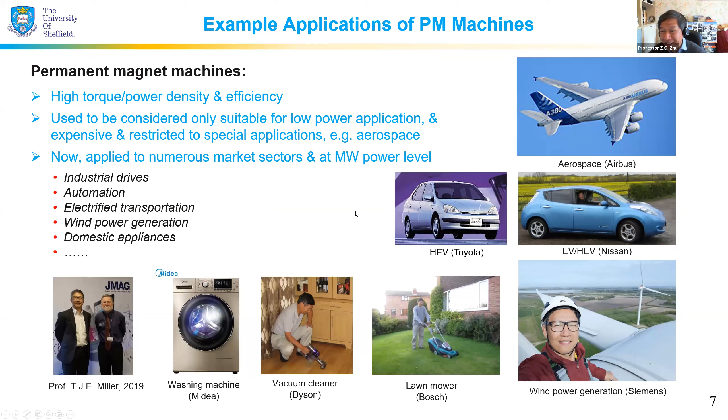That's for an electric ship. So the power is getting higher and higher. We don't know the limit, and we're trying to push as high as possible.

If we look at the permanent magnet machine, when I talk about permanent magnet machines, I'm mainly talking about the rare earth magnet, specifically neodymium magnet type machines. Today, I'm particularly going to focus on the so-called IPM machine — interior permanent magnet rotor.

Before that, I'd like to make, as usual, an introduction to the IPM machine. So-called IPM machine means the magnet has been buried inside the rotor iron. The nice thing here is that you don't need any extra retainer for the magnet. Now we have the magnet for excitation, and in order to produce torque, we must have current carrying conductors, so on the stator side we have conductors.

Then, in order to improve the magnetic circuit, we need iron, or very often we call it lamination, on the rotor and stator to improve the magnetic circuit. Because electrical machines normally always have one stationary part and one rotating part, we also need an air gap. If we talk very briefly, that's all for an electrical machine — but it's not as simple as that. There's a lot of variety there.

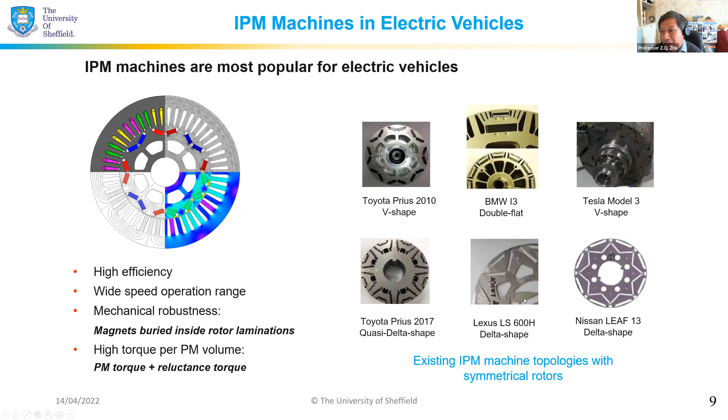But if we just focus on Toyota's IPM machines, I've been working with them continuously for more than 20 years now, and witnessed their development, and it's very exciting. So they started with the I-bar and then changed it to V-shape. The reason they changed it to V-shape is because you can utilize flux focusing—the cross-section area of this one is larger than that. And then they used the delta type to enhance the air gap field, for example.

And then one generation, the change was actually not in the magnet, but in the winding and the structure, like hairpin type. And then the latest one, as I mentioned, is like this one. They all have their features. And now the important thing is all of them are utilizing a similar stator, essentially the same stator.

So that means for the IPM machine, we normally need to have a so-called distributed overlapping winding in order to utilize the reluctance torque. This is important, and there's more variation in the rotor topologies.

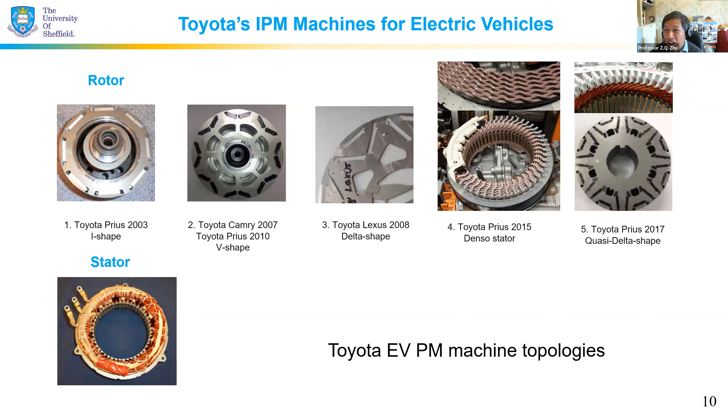This is quite a common feature for permanent magnet machines. Okay, now let's have a look at the IPM machine. You can have a variety here, showing the influence of the number of layers for the IPM machine. So here we've got only one layer, here two layers, here three layers, and here a lot of layers. You can even utilize the lamination, axially laminated, segmented by the magnet, for example.

In this case, obviously, theoretically, as the number of layers increases, the reluctance torque increases, and the performance gets better and better. But we need to consider that as the number of layers increases, the manufacturing complexity increases, and we need a trade-off. On the other hand, in terms of performance, as the number of layers increases, the gain you get gradually diminishes.

So it's quite saturated. While the performance gradually saturates, what's the point if we try to put more money into manufacturing? So you can do an analysis, and you will find that from one layer to two layers, you have quite a significant improvement.

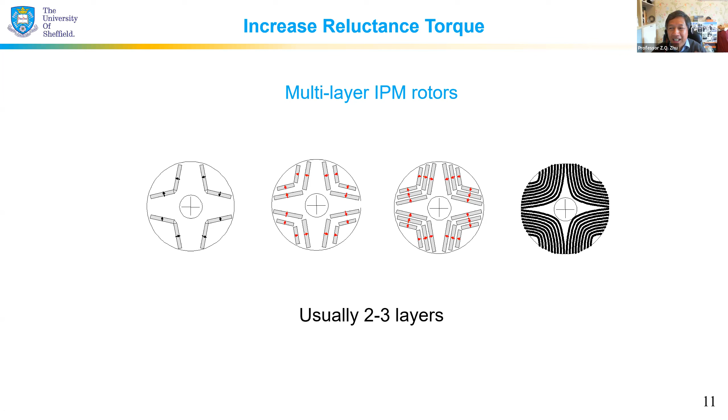From 2 layer to 3 layer, you still get some good improvement, but not as big as from 1 layer to 2 layer. From 3 layer to 4 layer, it's almost saturated, not much benefit there. So in reality, you will say 2-layer or 3-layer is the limit. In fact, currently, if you see all those IPM machines in commercialization, still less than 2 layers. That's because of the trade-off between cost and performance, so that's what we need to bear in mind.

Let's look at the popular IPM rotors already utilized in Toyota, Nissan, BMW, or more popularly now called the double V. Important things are not only the amount of magnet material but also the number of magnets, because the more segments you have, the more you need to handle, which relates to labor cost or manufacturing cost. So this V-shaped one only has 2 magnets per pole, this one has 3 magnets per pole, this one also only 2, and this one has 4. People try to reduce the amount of magnet segments as much as possible, again as a trade-off between cost and performance.

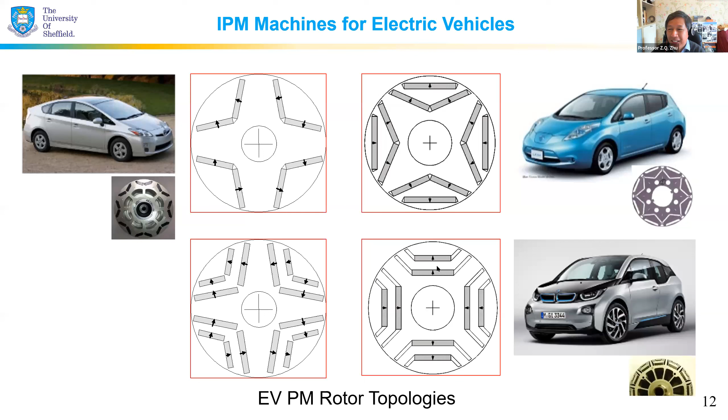I'd like to quickly go through the stator side. Not too many variations, but still some variety there. Here you can see the coil simply wound on the tooth. This is what we call double layer, because you have 2 coil sides in the same slot. This one is called single layer winding, or non-overlapping winding, because if you look at the end winding, they are not overlapping each other for phase A, or A, B, C phases. This kind of winding looks very neat, and it's very good for automation because you can make it modular. The end winding is so short that the effective part can be extended within the same machine space envelope. But one issue with this type of machine is it's normally a fractional slot machine, meaning the number of slots per phase is fractional.

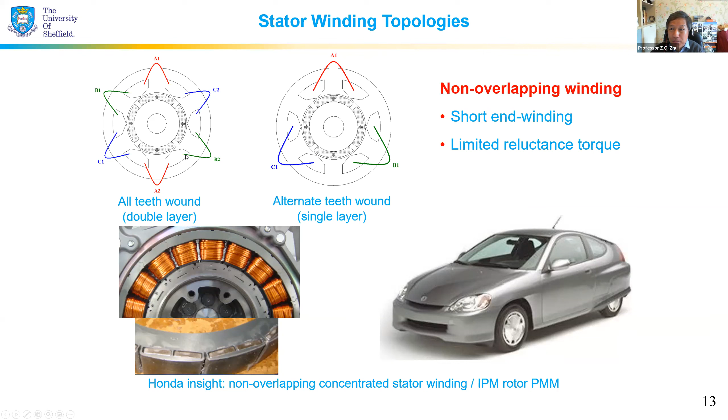Consequently, the reluctance torque will be limited, meaning you need to use more magnets to produce the same torque. In this aspect, it's not so good because you need more magnets, but the end winding is shorter. So you need a good balance depending on which factor matters more. But in electric vehicles in general, this type of machine topology is less used for the main traction machine.

The more popular one is this so-called overlapping winding, which can be distributed, meaning per pole we have more than 1 coil, versus just 1 coil which is concentrated winding. This is because the coil pitch is almost equal to the pole pitch - you can see from here to there, that's almost 1 pole pitch - so you can utilize the collective flux produced by that magnet. More importantly, if we utilize the IPM rotor - this is SPM rotor, only for illustration of the stator winding - if you utilize the IPM rotor, you can utilize the reluctance torque, which is very good. You can reduce the amount of magnet, but this one has a longer end winding. Overall, as a trade-off, the gain from reluctance torque versus the demerit of longer end winding is a good trade-off.

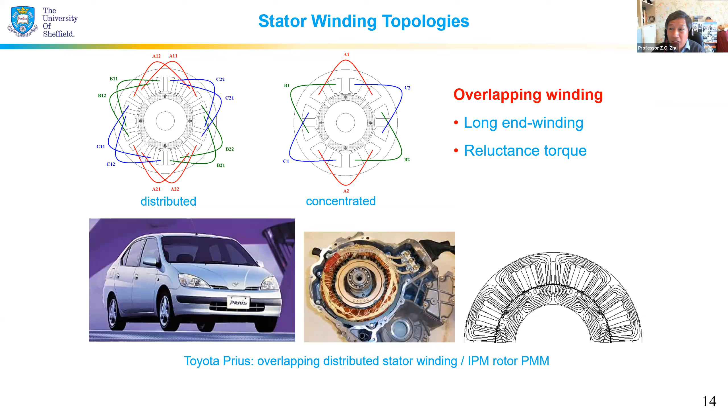So this is more popular. Of course, there's a lot of other performance considerations, for example high speed uncontrolled generator fault - this one is better because you utilize less magnet, so consequently the EMF will be lower than the other type. In case of inverter failure, the induced EMF is lower, so the inverter is safe, the DC link side is safe, for example. There's a lot of other factors, but I'm only talking about the main part.

Now I'm going to start with my main topic. But before that, I would like to talk about what is the torque production in the IPM permanent magnet machine.

As I mentioned, in the IPM machine, we have two torque components. One is called the PM torque, one is called the reluctance torque. Reluctance torque has nothing to do with the permanent magnet. Even if you don't have any magnet there, the machine still can generate reluctance torque. But with only reluctance torque, you normally have lower torque density compared with the PM machine, and also you have poor power factor. So this IPM machine has the synergy of both, utilizing less magnet and also utilizing the reluctance torque.

The PM torque here is expressed like this. This part is the PM torque, the conventional one — essentially flux produced by the magnet times the current. That's the power and the force or torque. Then another one is pure reluctance torque. You can see the angle here — the reluctance torque has twice the angle.

If you just plot the PM torque and the reluctance torque, it looks something like this. PM torque is like that — this is the current. Zero means the EMF and the current phase angle are aligned. And maximum is always when the EMF is aligned with the current, you get maximum.

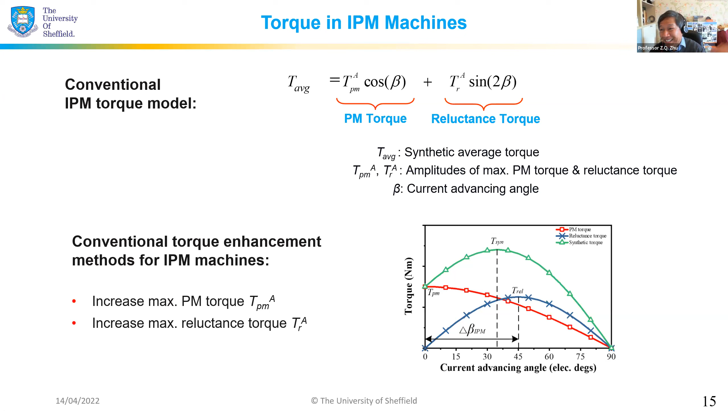If you would like to increase the torque of this IPM machine, one option is to increase the PM torque, another is to increase the reluctance torque. But today I'm going to talk about something a little different — changing the angle between the maximums, trying to utilize another degree of freedom to increase the torque. So the remaining part, I'm only going to show examples.

But before that, if we want to increase the PM torque and reluctance torque, how do we do it? To increase the PM torque, as I mentioned, you can utilize flux focusing by employing a V-shaped magnet, or even more by using a U-shaped magnet for flux focusing. Therefore, you can have more flux produced in the air gap to link with the stator coil, producing higher flux linkage and consequently a higher back EMF waveform and magnetomotive force.

But in this case, obviously you are using more magnet material and a higher number of magnet segments, so you need to bear in mind the cost — the more cost you put in, the vehicle performance may get better, but if you're making the machine, your profit is reducing as well.

Then you can also try to increase the reluctance torque. Normally you try to increase the number of layers to increase the so-called saliency ratio, that is, the ratio between the D-axis and Q-axis inductance. But as I mentioned earlier, as the number gradually increases, that ratio gradually diminishes. So typically we use 2 or 3 layers — that's very common.

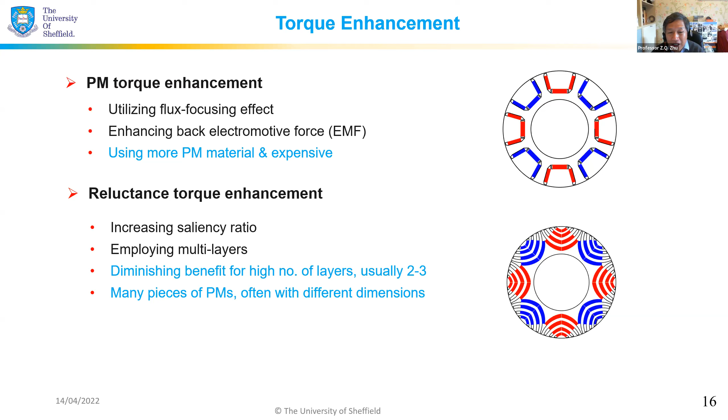Now let's go to my main topic. What we try to use is a technique called the magnetic field shifting technique. We try to change the angle between the peaks of PM torque and reluctance torque to enhance the torque. By doing that, we need to introduce so-called asymmetric IPM machine techniques. Let's have a look.

First, I would like to compare with the conventional IPM machine. In the conventional IPM machine, essentially you don't have any shift. For this one, we try to introduce an angle — this is the so-called asymmetric IPM rotor shifting angle. So what's happening by doing that?

This is what I showed you earlier — I'm going to talk about this one. You have the PM torque here, you have the reluctance torque there. Their peaks' position for that current angle, related to the rotor angle, has been shifted — it's the same thing, one is in time, one is in space. So now the PM torque is here, and the reluctance torque is here — that bit of angle has been changed.

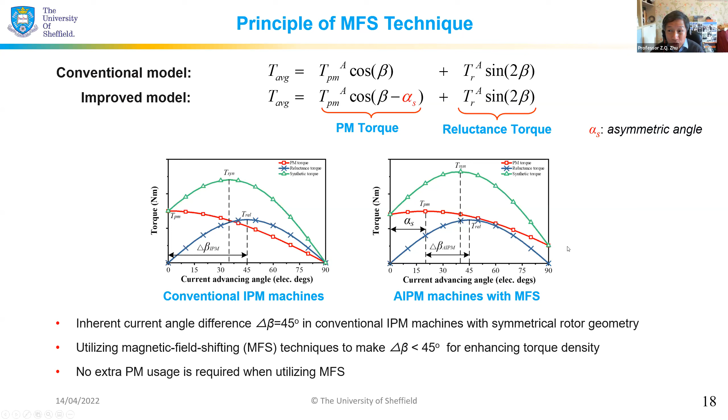The amount of magnet remains the same. We keep it the same, so that magnet amount, the cost is the same.

Now let's look at how we can realize this so-called asymmetry. There's quite a famous topology proposed by Mitsubishi. This is essentially V-shaped. We've got this side and that side, but both sides are not symmetrical. Not only are they not symmetrical, but importantly we have a flux barrier there. Because if you use a V-shape without that flux barrier, there's not much difference from the symmetrical case, because the flux ultimately all goes to the same place anyway, focused onto there.

By introducing this flux barrier, we can modify the air gap field distribution, shift the fundamental air gap flux density, and by shifting it, we can change the angle. This is a simple principle.

If you look at that, there's a variety you can do. For example, you can have a PM configuration, asymmetric or symmetric, or the rotor core geometry, or the flux barrier, which can be symmetrical or asymmetrical. Together, you can form novel asymmetric IPM machine topologies.

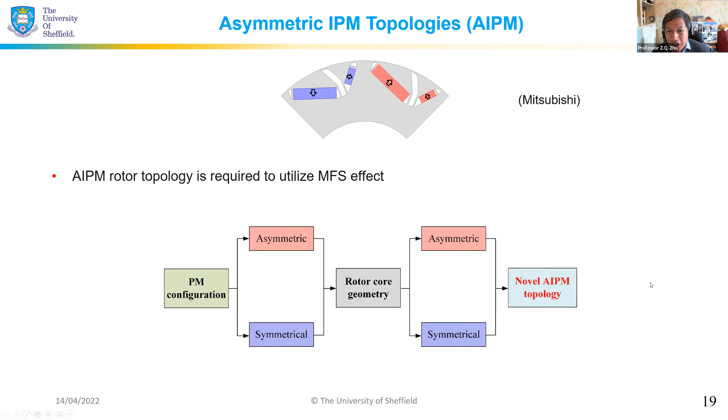As I mentioned at the beginning, PM machines have a lot of variety, although it looks simple - only got magnet, iron, and copper. But we have a lot of topologies. So even here, we can have a lot.

But how do we define those machine topologies? We have proposed a simple technique, utilizing 4 quadrants, where one axis is the rotor core, the flux barrier, whether symmetrical or not. This side, the rotor iron structure, is all symmetrical, and that side is asymmetrical. The other axis is the PM configurations - the top side PM configurations are symmetrical, and the bottom one is asymmetrical.

Let's take one example. If you look at the iron structure here, it's symmetrical about the axis of the pole. Symmetrical here, but this side is not symmetrical - you look, this got a little bit there, not symmetrical. This side is very obvious, not symmetrical. But if we look at the magnet, for example, here it's symmetrical, but that's asymmetrical.

Now let's have a look at more detail. So this is the overall view. Let's look at the first quadrant, because the group here is symmetrical here, symmetrical here, so you can have a combination - 2 combinations, in total 4. So just focus on this: the magnet should be symmetrical, and the iron structure should be symmetrical. So here you can have this and that. How do I utilize it?

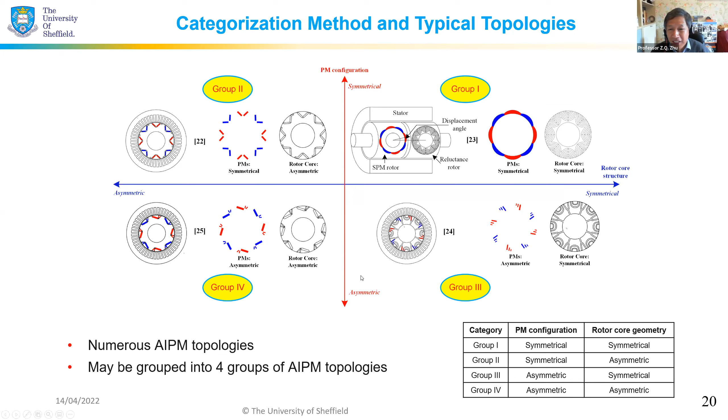Now let's have a look one by one. Each of them - first is the symmetrical PMs and symmetrical rotor core. Essentially you can try to utilize 2 rotors on the same shaft, so it's still quite simple, not that complicated. But the relative position between this PM rotor and the reluctance rotor can be shifted, so you have freedom to change it here.

In fact, this topology was well developed a long time ago, by Professor Brian Chalmers at Manchester. But at that time, they didn't consider this torque enhancement - they mainly considered how to improve the flux weakening capability.

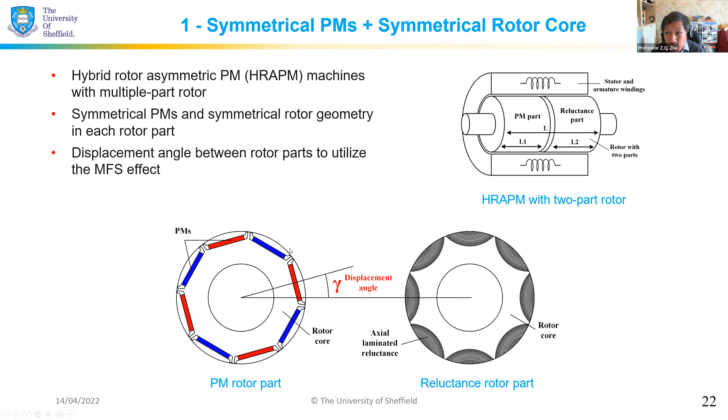Their machine is similar, but they didn't consider this angle for torque enhancement, so it's slightly different. In this case, on the rotor part, you may have 2 rotor parts, or 3 rotor parts, to make it more balanced. Then around the axis, not necessarily do you need identical parts.

You can optimize the PM torque and reluctance torque components. So in addition to the conventional rotor, you have at least 2 more freedoms: one is the portion around the axis, another is the angle between the 2 rotors. So you get more freedom to optimize the machine.

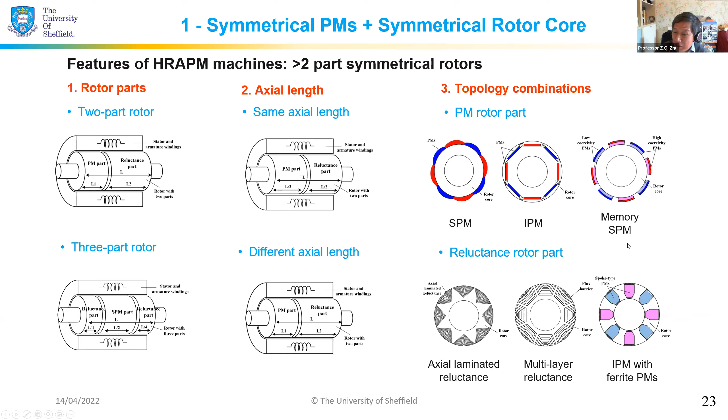In terms of topology, as I mentioned earlier, I'm showing one surface mounted and another pure reluctance. Obviously you can have any type of PM rotor or reluctance PM rotor as well. This one is even a memory machine, for example, and you can have a spoke type, or any other combination. So there's a variety here.

Typically showing here, this is with the 2 parts equal type, and then they've got 3 portions, also 3 portions where the reluctance rotor is in the middle or at the other side. But honestly speaking, by doing that, you definitely will get good torque improvement.

Whether you have axial balance or unbalance depends on the structure. If the two portions are structurally different, it will cause unbalance. Even if this side has the same structure, but one is magnet and one is reluctance, it's also not balanced. But this side is definitely balanced - axially it's symmetric.

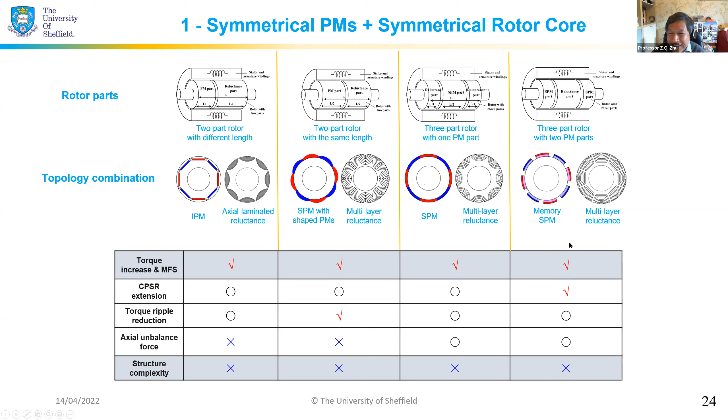Now we'll look at another one, which has symmetrical PM but asymmetrical rotor core. In this case, we only utilize one rotor to realize this magnetic field shift. You can see the symmetrical magnet - all of them are symmetrical. But here you can clearly see the asymmetric iron there.

There's a lot of asymmetry you can see here as well. You can see the iron cavity or flux barriers - they are not symmetrical. This one goes towards outside, this one towards inside, this one is somewhere here. It's like that Mitsubishi one - I'll talk more about it later, don't worry.

Then this one has symmetry, but the barrier is something like that. And when it's a spoke type, you can shift it. Well, this one and that one have some similarity there - just a different realization. Some of them you've probably found are already quite popular anyway.

Again you can compare this torque increase - yes, they can increase, no problem, the shifting effect is all there. Then this one is interesting, the very well known Mitsubishi one - I'll show you later, the effect is quite small. Not only found by us, but also found by other professors, Japanese professors.

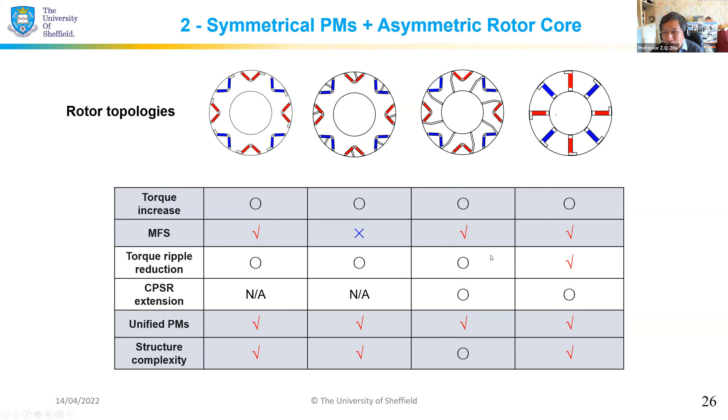Now we move on to the asymmetrical PM with symmetrical rotor cores. In this case, if you try to make it asymmetrical inside this type of machine, it's quite simple because we just make the air gap different here. The magnet shifts relative to the inside of the machine.

Now in this case, also the same way, but this is another machine topology, itself different, with the surface and IPM combination. So you can also just shift it there. And then you can also utilize the hybrid magnet type.

In this case, one side is neodymium iron boron magnet, and the other side is ferrite. So to make it asymmetric, okay? But you do need to be very careful, in my opinion.

It looks like the asymmetric alignment is fine, but in reality, in theory, the ferrite and the neodymium iron boron magnet produce a flux that goes to the air gap as a resultant. So in theory, without any asymmetric alignment, without the saturation effect, this is still symmetrical in the air gap. So you need to be very careful, or you can think of it another way: this type of asymmetry could be not so effective.

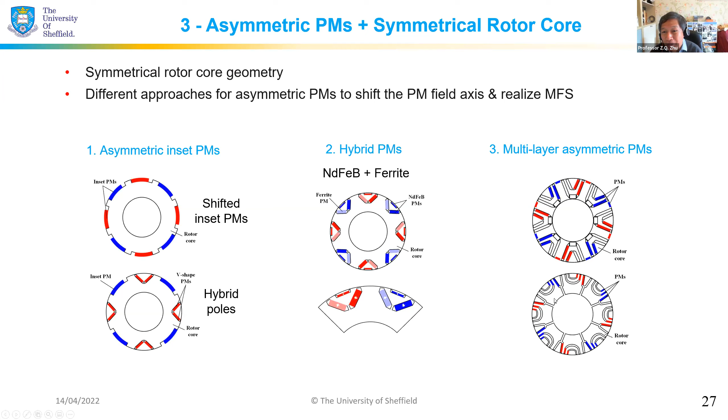Now, if you look here, we consider torque, yes, can be increased. The magnetic field shifting, yes, we can realize that. And the important thing, very important, is about the unified PM.

Because, for example, this one has two types of magnet, this type and that type. But that one also has two types there. This one, all the magnets have different sizes in one pole, and this one the same, so that could be costly.

A lot of people, when they design it, they don't care about this. This is a problem. If you look at existing commercial products, we find that they are all identical. Why? Simpler. And the structure complexity, we also need to consider as well.

Obviously, these two parts are simple. Yeah, this is the simplest. Then this one, after this, becomes more and more complicated. So we need to bear that in mind.

When the machine structure is too complex, the application will be limited because you also make the manufacturing cost expensive. This is why I always encourage my students to think at least about the simple way, not the complicated way. You can make it complicated and write a paper, but that paper is not very valuable because in reality, it's not able to be employed.

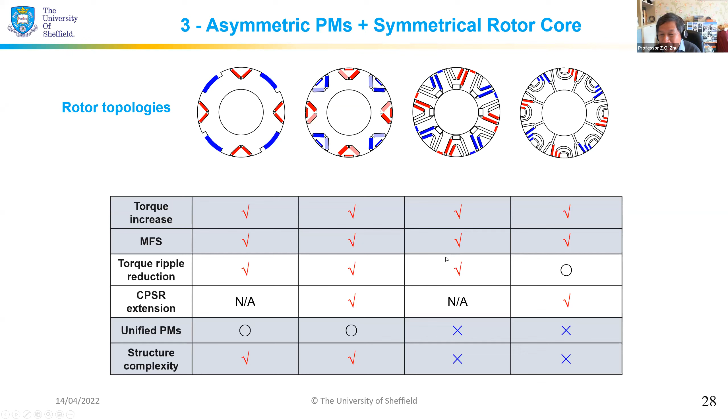Okay, now the last one we try to introduce is asymmetric PM and asymmetric flux barrier rotor core. In this case, you can say it's a V shape more or less, but one side is different. One side has no magnet, so only one magnet. Simple. And then another one is a hybrid one.

You can see here two layers, here one layer. Yeah, here two layer, here one layer. And then this one, one of the magnets has been taken off. This is all proposed by us, and yeah, I'll show you more.

And this one is a combination of the spoke type and the V shape, together with asymmetry there. Now this is important: without that asymmetric bit put in there, the machine is still symmetrical. Okay, so this is a mixed radial and circumferential one, and this one is a multi-layer one. You put the magnet asymmetric there.

But to be honest, it's terribly complicated. By doing that, as I said, if it's linear, no difference. But this one, yes, has asymmetry. It's not produced by this part, it's produced by their bit. Can you see there?

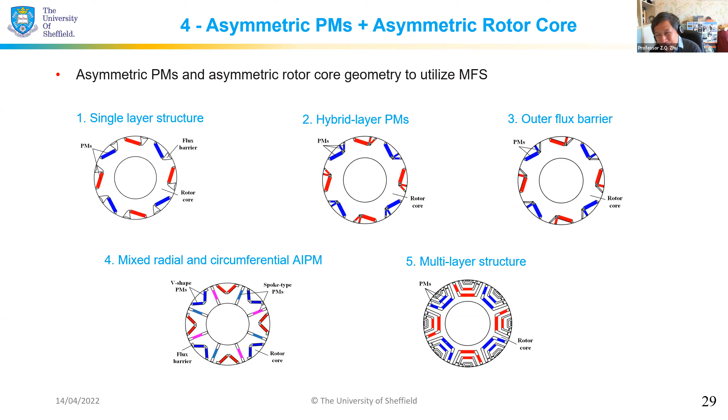They've got a little bit of flux barrier there. To me, it's horrible anyway. Okay, it is a machine, but I wouldn't use it anyway.

Okay, let's have a look further in the comparison. The torque increment, yes, you can increase it, and I'm not telling you how much — I'll show you the detail later. The magnetic field also can be shifted as well.

Torque ripple reduction: when you use multi-layer, you do need to be very careful. And then in terms of magnet, whether there's a same size one, this you can use just two. But that one is the best, because the reason is you can have this magnet, that magnet, all the same size — very good. And this one is slightly less, because you can't make this one and that one the same. But in theory it's not too bad as well.

It depends on the design. The structural complexity, definitely that one is more complicated. Okay, this one is about the mechanical integrity — it's a bit more, but this one is easier.

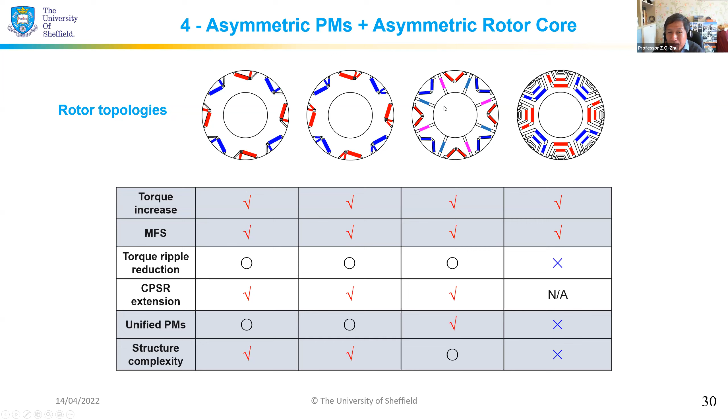Okay, now we have 4, so I would like to put them all together. Let's talk about it, and let's move it here. Now in this case — I don't understand why, but one cursor keeps moving automatically, I can't figure it out yet. Last time I tried to remove it, I couldn't. Excuse me. Okay, so I've put it down here, the global one.

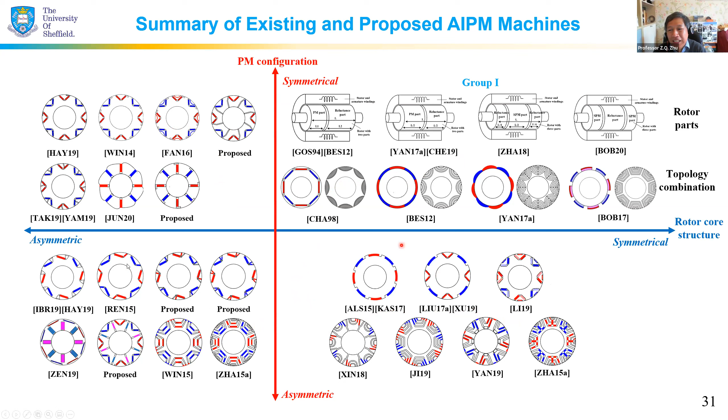You've got essentially two rotor — okay, two rotor there — and you can evaluate it all there. I just tried to put as much as I can, but I've talked about all those in detail. After that, I'll try to look at the performance, the detailed comparison. I think this is quite important. I'm sure principally you understand that already, right?

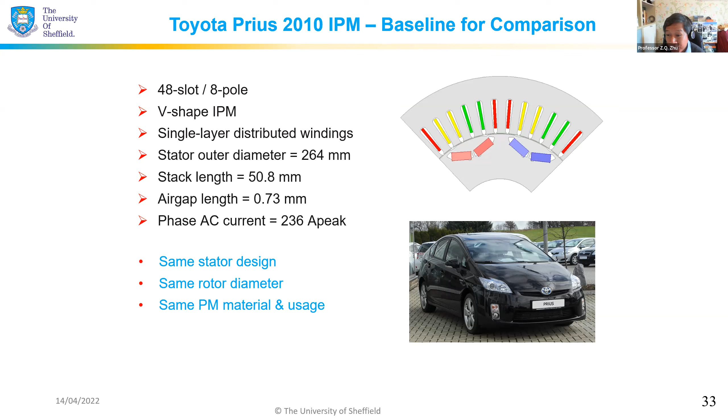Now let's have a comparison. So what I'm trying to do is take the Toyota Prius as a baseline, so the vast majority of dimensions are the same — same stator design, same rotor diameter, air gap, and same magnet material and usage. All this is the same.

Now let's have a look. This is the topologies which I'm going to compare, referenced to the Toyota Prius. So I have selected six machine topologies. Among these, three of them are proposed by us at Sheffield, by my PhD student Dr. Yang Xiao, and this is one already existing in the literature.

I just quickly highlight again: this is a combination of SPM and V-shape IPM. And this one is V-shaped, but with an asymmetric cavity. And this one has two rotors, combined with surface-mounted and IPM.

And then the one we proposed here essentially is this hybrid spoke and radial one, but with asymmetry there — you can see asymmetry here and asymmetry there. And here we've got essentially one side is a single layer, one side is two layer. And then one of them has two small magnets inserted into two cavities.

And then this one only puts the magnet into one of them. Okay, I will compare with another one with the magnet only on this side, because that's the Mitsubishi one. I'll compare separately, but let's compare these six first.

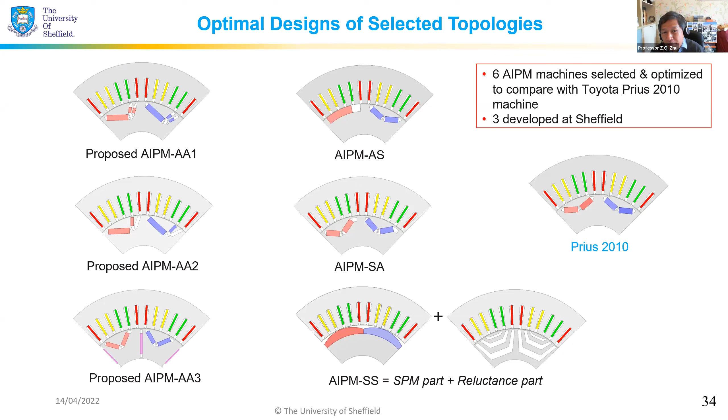Now, for all those six, I'm showing the structures here again just for simplicity. So first of all, what you can see: here I'm showing the resultant torque, that's the red color, and then the PM torque, which is the dark blue one, and the green one is the reluctance torque.

So you can see all those machines have reluctance and PM torque there. The amount of magnet is the same, don't forget. Okay, now it's quite interesting — I'm not going to talk about that one because it's essentially reflected here and it's the same. That's just showing what happens when the current is small until it's very large, and they are very consistent. I don't see too much crossover — there's a couple of them that crossover, but not too much.

So let's just talk about this one. In this case, let's compare this machine and that machine because they're next to each other. Very interesting: you can see this machine compared with the Toyota Prius, the PM torque is less, here and there. So PM torque is less than the Toyota Prius, reluctance torque is also less than the Toyota Prius, but the resultant torque is higher. So this clearly illustrates the effectiveness of magnetic field shifting — PM torque is less, reluctance torque is less, resultant is higher, because we have optimized the angle between them. So this is quite an interesting one.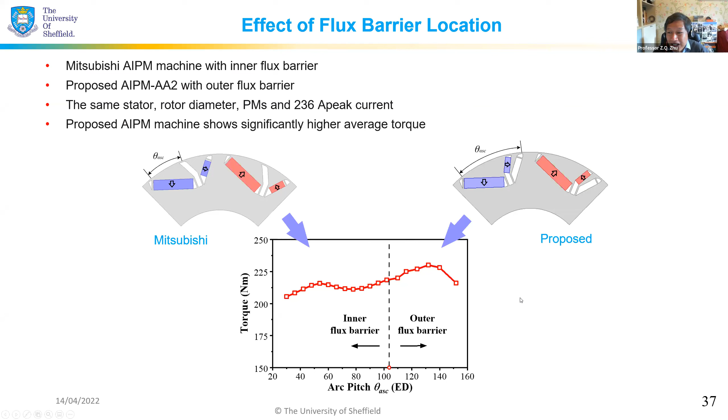Okay, those mentioned, proposed by Sheffield, we all patented. And now here I try to make another comparison, and detail the thing there. I think here I'll try to compare this performance. One reason is because I mentioned that with the asymmetric one, we got some good performance there. But in this case, what I'm trying to do, another comparison, is this asymmetric - this side is one layer, this side is two layer.

It's a bit obvious, because we optimized under that condition. Now in this case, if we look at the average torque, the total torque, which one is the best? This one is the best. Okay, and then this one is the second. Clearly putting the cavity outside is better than the inside. You can see that. Quite interesting. If you take the magnet off, then definitely it is the lowest.

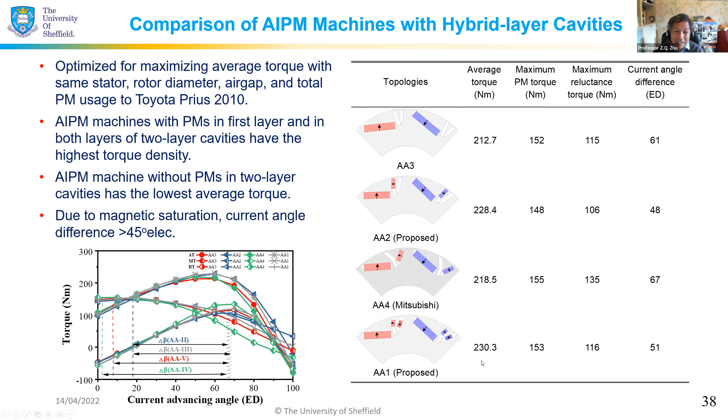Why? This all reflects into that angle shifting there. So it's a vector. It's not just numerically added together, it's a vector sum. That results in the difference of the total torque. So this is very interesting in my opinion.

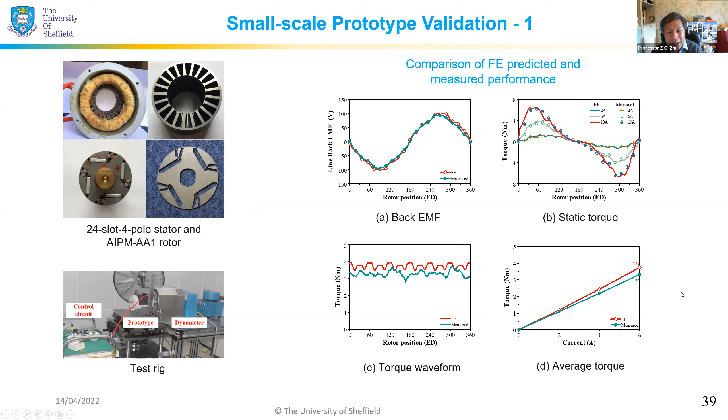And then consider the static torque is like this, the torque against the rotor position. Although the measured one will always be smaller because the finite element is 2-dimensional. And then that's the torque against the current. So very good agreement there, in my opinion. And of course, if you try to calculate in 3-dimensional, it will be even better. But I think that's really already very good. It's clearly showing the principle works.

And this is showing another machine where we have taken 1 piece of magnet off, so only got 1 magnet there. Okay, and then that's the EMF, that's the static torque, and we measured the static torque and the EMF in 3 phases, and also the torque against the current. Again, it's a 2-dimensional finite element, and the measured result actually is quite good.

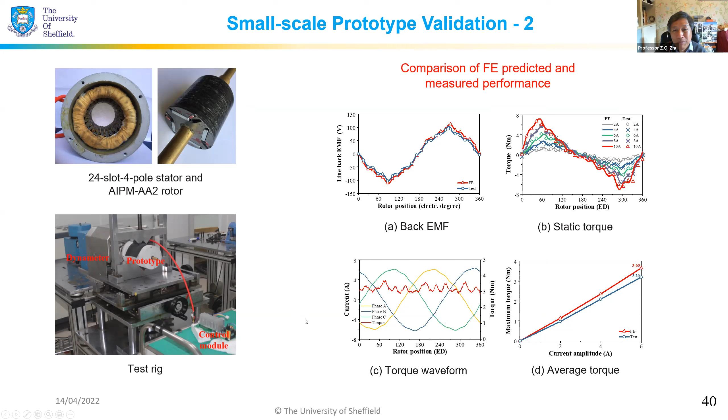Okay, so I think this is towards the end of my presentation, and I'll try to make a simple conclusion. Essentially showing this magnetic field shifting really works. It can increase the torque by changing the peak PM torque and the peak reluctance torque, so the resultant vector resultant torque could be higher.

Then there's a variety of topologies, I showed you already a lot there. We also proposed a method to categorize it and make it easy to understand according to the symmetrical or asymmetrical alignment of PMs and the cavity. And also, I showed you a lot of machine topologies there, particularly those proposed by us with simple structure and improved torque capability.

So I personally think this one has a very, very good opportunity to be applied to electric vehicles. Now, we need to bear in mind this one has the asymmetric rotor. You might want to ask me a question, so I'm going to answer in advance now.